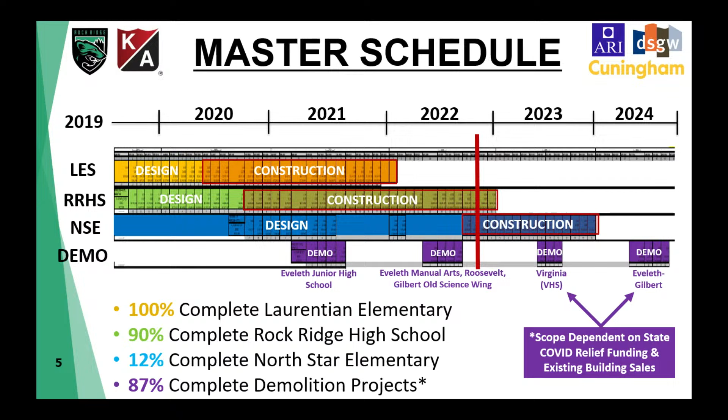We'll talk after. Okay, so we are 100% complete with the Laurentian, 90% complete on the high school - we just looked at that percentage again today with Paul. 12% complete on North Star, and 87% complete on the demo. And that's got a star there because we don't have the remainder of the campuses in the budget anymore, as we zeroed everything out. So that's 87% of what is currently funded for.

Yes, so, yeah - safety, an important thing. We have about 150 workers a day currently on the sites.

40 contractors. That's going to ramp up as North Star ramps up, and it'll go down as the high school completes. So it's going to kind of hang at about 150, but it'll just switch from one project to the next.

This is a big deal to not have any lost time accidents or OSHA violations on this bigger project. It's a testament to our field personnel and our PMs on their planning and just continuously hammering this.

The most unsafe times on projects is right at the beginning and right at the end. In the beginning, people don't know where things are and aren't familiar with each other. At the end, all they see is the barn and they're running towards it and they get sloppy. Things they normally would have put a handrail on, well, I'm only going to do one thing so I don't put it on. So our field staff really has to stay on that during this time. But they're doing a great job.

So quality. One of the biggest things about quality is you've got to teach in the academy how important quality is. We're going to start with the student builds, and Paul's going to talk a little bit about those. Absolutely, and the Wolverine Constructors, the Rock Ridge Construction Department, have continued to do a really amazing job.

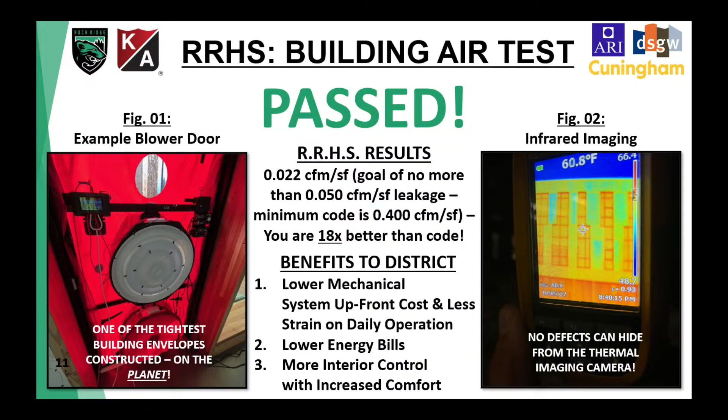There's a lot of building codes that mandate what those minimum flows are. And as part of state of Minnesota requirements for these publicly funded projects, you're required to have a commissioning agent come in and verify that the air handling units and all of the air diffusers are actually outputting the correct amount of fresh air into the spaces. So not only was it thought about and designed into it, it's also being double checked by an independent third party to make sure that's happening.

And just because people wanted to have operable windows, since their old buildings had them, pretty much each space has one operable window. We greatly encourage you not to use those until you give the system a chance to work, because it does start to throw off those systems. That's for a different session.

All right, sounds good. Also in the quality section, I'm just going to go through a couple of pictures with the group here to give the board a sense of what's been occurring over the last quarter and what the state of the projects looks like today.

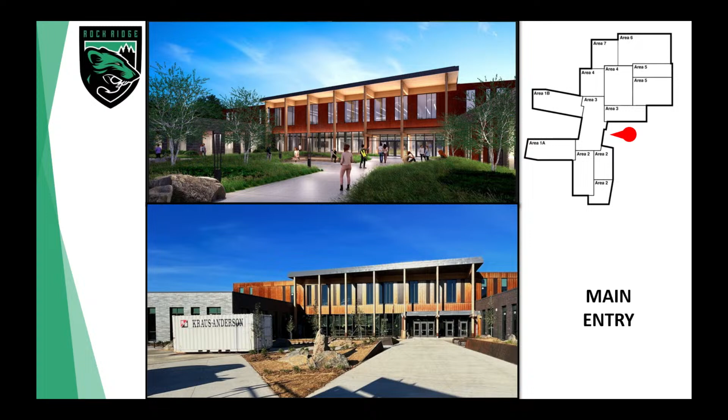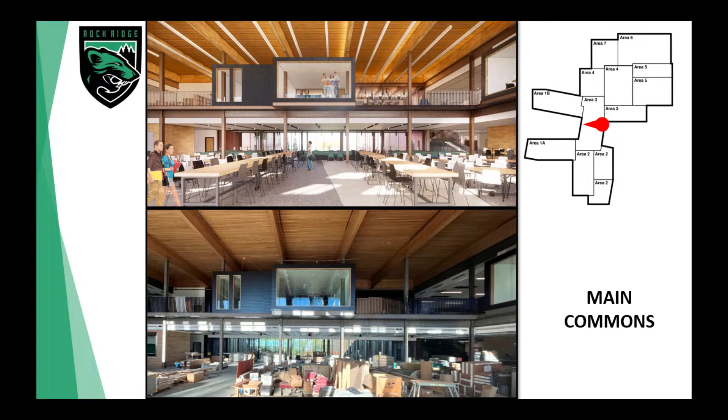All right, and then you step inside those front doors and you get your wow factor, heavy timber structure, beautiful glass curtain walls, everybody together in the main commons, lots of student activity going on, and then you get these 3 boxes on each side too, so you get a taste of the educational experience - technology, meeting, laboratory spaces. It's your first taste, your first survey. Come inside our building, and you're gonna get exposed passively to all those different things that are coming on.

And on your first way in, welcome to our building, by the way. Here's our main office, come on in, we'll help - what can we help you with? Really beautiful custom casework that's been done here, and you will be getting a nice graphic decal that'll be applied onto here too. So that has stayed in the project, and it's going to look really fantastic.

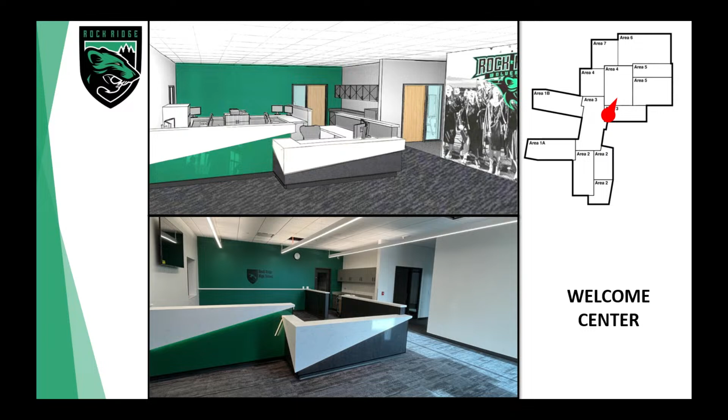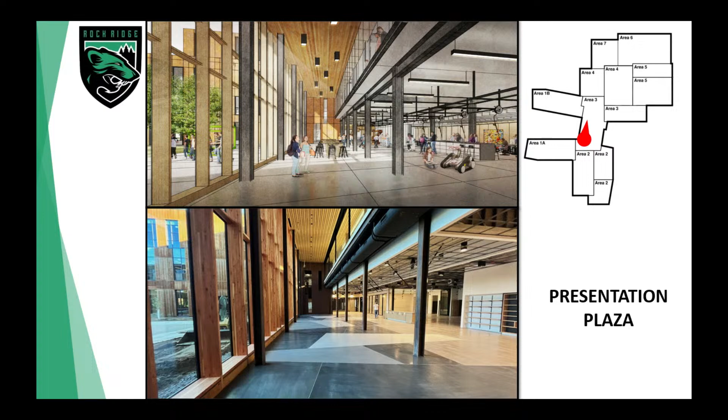All right, and then on the lower level of the commons, if you were to go over that railing, let me show you what we're doing inside the building. Let the students show you what they're doing visually, and you can also hear their presentations describing what they're doing as well. So a great showcase space here in the center.

A lot of these baffles are being installed right now in this area. Back to your sound transferring, it helps a lot.

And the learning doesn't stop inside the building. Of course, the learning gets extended out to this beautiful space that's in between your two learning neighborhoods. It's now been fully landscaped, it's now been fully hardscaped. You can really get a sense of what that's going to be like. There's some beautiful permanent furniture that's been set up, and some additional semi-permanent movable furniture so that it supports your flexibility for whatever you need out there too.

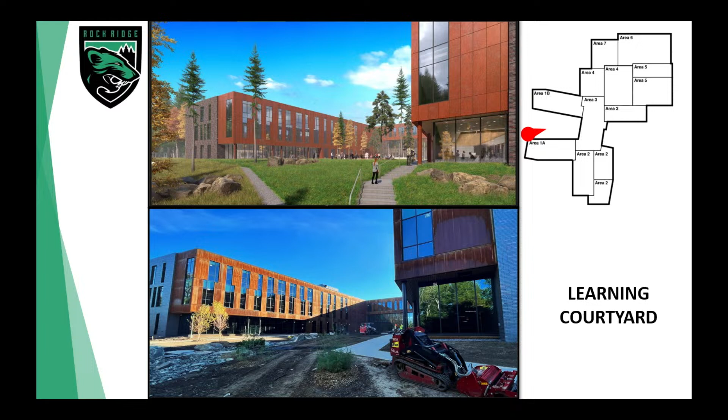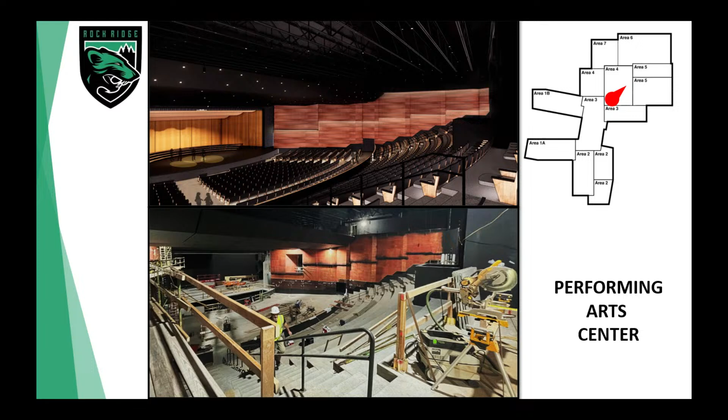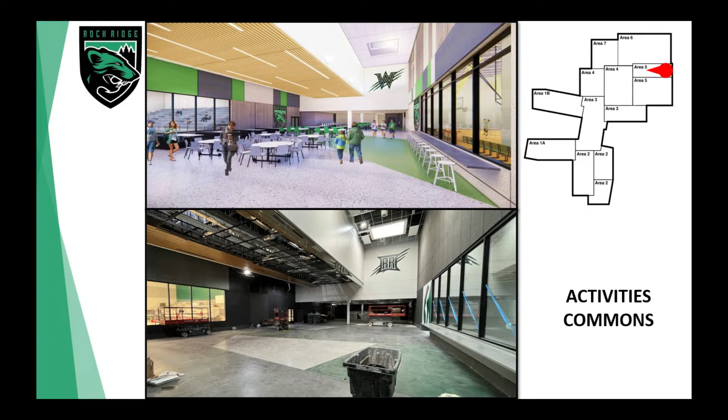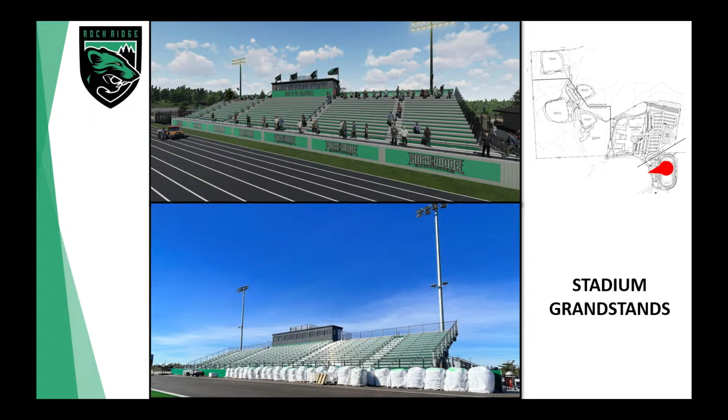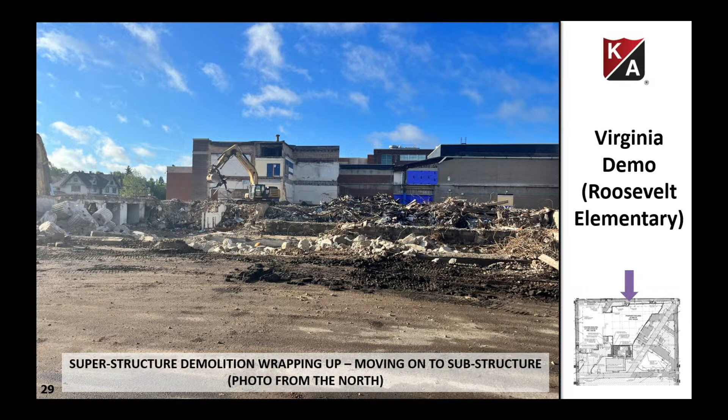So Morgan couldn't be here tonight, so I get to cover demo because she loves demolition. Just real quick on demo, this is the actual demolition of Roosevelt before we started our foundations. You can see the annex and Malone in the background. Then we got down to this, the swimming pool that was taken out, and we got down to the foundations. You can just see your existing gym right there. Oh no, that's the annex right there.

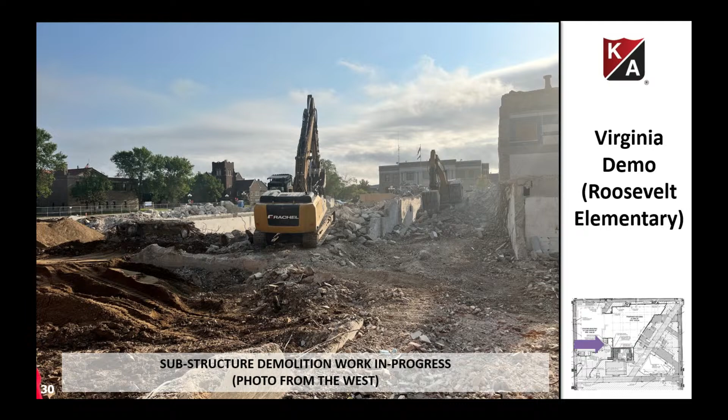Once we got done with the foundations and removed that, we came in immediately with the backfill. That's all been compacted and tested, and approved by a third-party testing company.

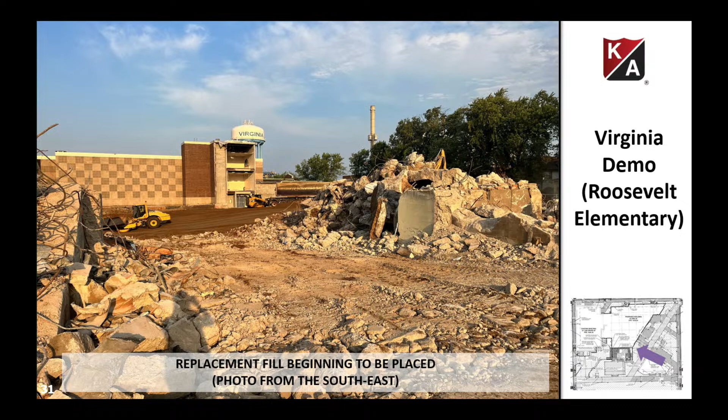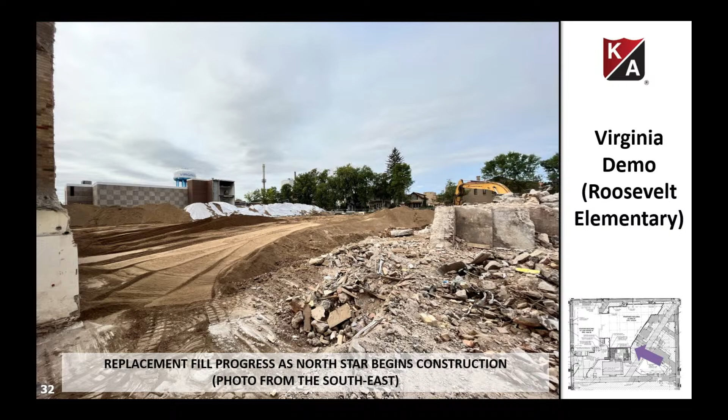We did some more backfill, and on the other side of this pile is where the 18-foot hole is, the excavation for those foundations. So we were coming off one side and coming into the other.

Gilbert, just to orient you, you can see where we're at the angle over there off the back side, pretty much from your bus garage area, looking at an angle.

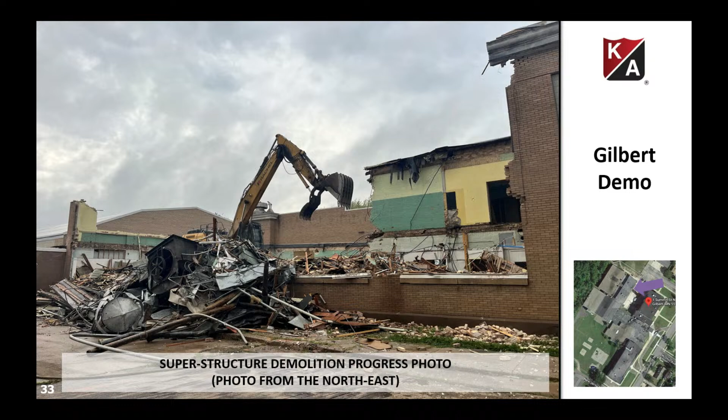This is the gymnasium that remains, where we left this wall in place, and then we temporaried these openings in it. This was the beginning of the demolition.

This is at 50%. Again, this is that wall where the gym is and the corridor in between. All of this is removed.

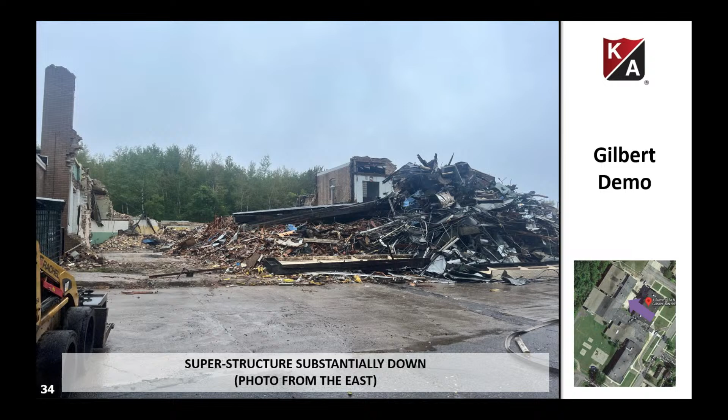This is after we're just loading out the last couple of loads over here.

We completely backfilled, again compacted and tested, and then black dirt put down. This is like three-quarters of the topsoil down, and then we're going to seed that.

I believe it's tomorrow now. We're going to seed that out.

I went up there, Pat, and took a look. It looks really, really good. Yeah, it did a good job. It looks great, I think. A lot of good coordination. A lot of good neighbors there too.

Sometimes when you demo, you get a little leery, right? We make sure we spray enough water on it to keep the dust down and everything. But there was one gal that came over with fudge for the guys. You weren't there that day. I missed that. I find it hard to believe you missed that. I know, right?

Usually I don't. All right, North Star groundbreaking, we started. I gotta say thank you to one guy that's actually in the room, Scott Manny, and Stacy Lampa for putting together a great groundbreaking. It was a good turnout.

Yes, all right, very good. It really was, yeah. I think it was a great turnout. You had a lot of representatives there too, congressmen and senate and everything, so it went really good.

Now, wait a minute, you can't just recognize them. Right here is Pete's little child, little dog. It's little Cheyenne. You gotta look close. Yeah, she's little. So she did a little shoveling too.

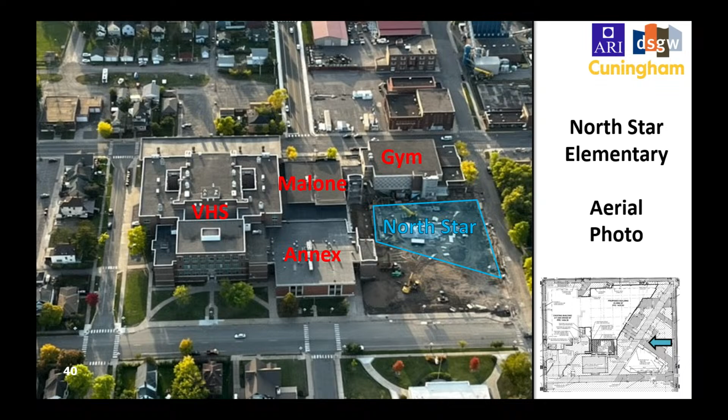So coming down to the ground level, this orientates you - this arrow here from the northeast, looking down your east wall. This is like the main entry wall, I'll call it. So that's where we're looking down here.

Footings poured, got your south wall - that's this right here. That was a double pour wall, so they got one level in there, and now I believe that level's poured as well. I've been on vacation, so they were poured when I was gone. Oh, you get a vacation? That's hard to believe. Well, Pat lets me go sometime.

So just walking our way around the building here a little bit, coming down to that southeast corner, just to get a little closer view. And then that is your boiler vent stack piping right here. That should be wrapping up by the end of the month as well. So that boiler is currently heating your existing gymnasium, but it is also the boilers that will heat your new building.

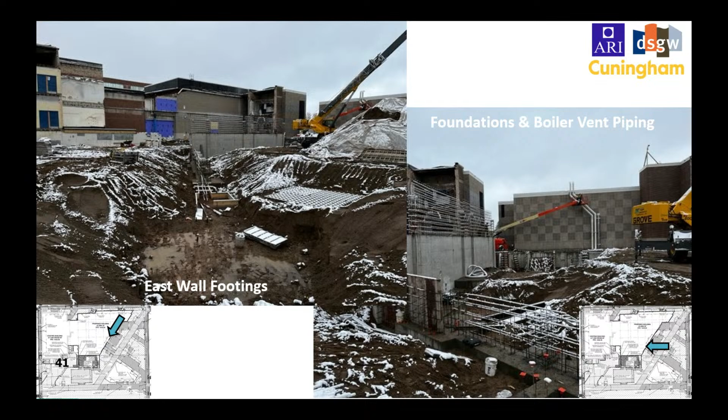So just looking down the south wall, another angle at the vent piping and the elevator lobbies for the existing gym right there. We've got the permanent walls in there actually right now, so we didn't have to temp it and then tear them down and put the permanents up after - we just put our permanent walls up right now. And once we attach them, we can finish them with insulation and drywall.

And Pete, while you're looking at the gym, can you talk about the type of work you're doing inside? Yeah, so obviously the boiler room - the boilers are up and running. And then we also have done some refinishing and rebranding in the lobby - demo there, some drywall patching, prepping for casework, and also painting and getting some decals in there. The painting and decals will probably come later in the project, just so we don't wreck them during construction.

The main data room is up and running, I believe, right Mike? So that's a big step forward as well. And then in the gym itself, we've replaced all the lights, so it's nice and bright LED lights in there.

You can actually see the game now when they play. Later on in the project, probably towards the end, we'll refinish the wood floor per the plan, so it'll be all the same lines as before. You'll have your cross courts, same size as what you originally had.

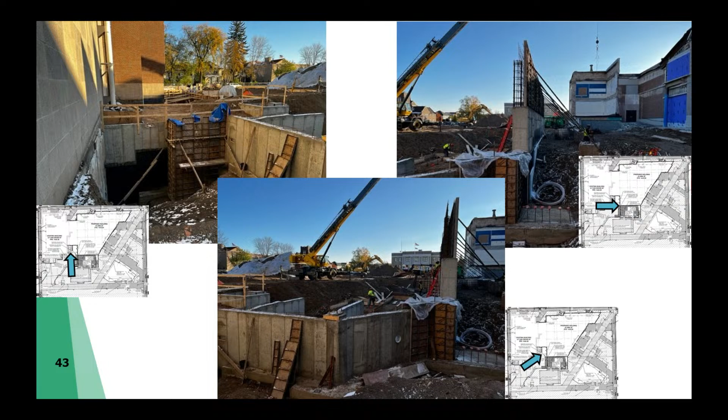But that's about it, moving along. I think budget. So Patrick is going to give a brief summary, and then we'll talk about each individual project after that.

And normally your expenditure should lag your schedule, because we put it in the ground, then they bill it. It takes about 30 days for that money to leave the account. If you ever see the expenditures higher than your completion, there has to be a reason—like sometimes we'll pre-buy something and have it come to the site.

We're getting pretty close to that on North Star, because we're taking a lot of materials in due to procurement issues, and storing them on site. So in some cases you might see where we bought all the insulation, paid for it, it's sitting on site, but we haven't put it into the building yet.